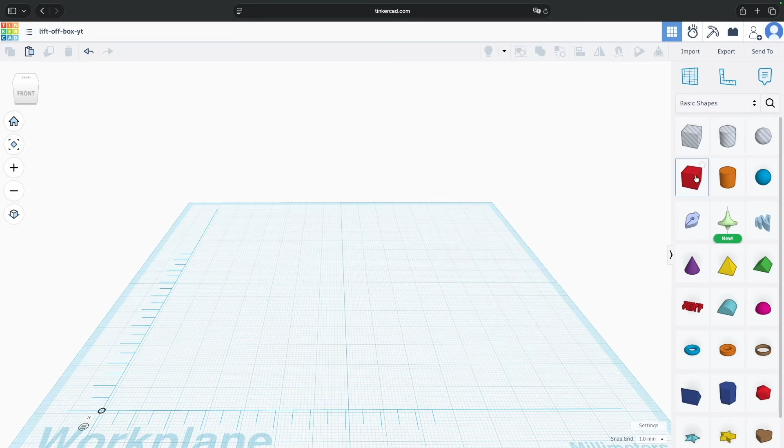The most common basic shape here is the cube, which is also referred to as box. Let's pick this and bring it to the center. Let's size the length as 50 mm and width also as 50 mm. We will make this 20 mm tall.

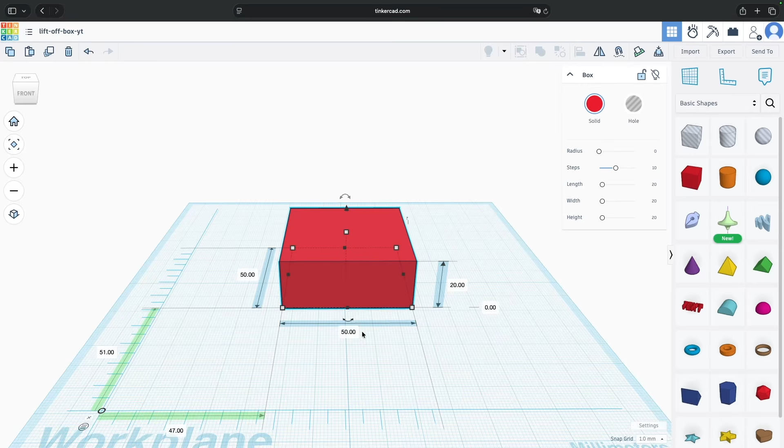Please note that I'm choosing this smaller size to ensure faster printing at my end and definitely to optimize on the filament consumption. But you can print this box in any size your 3D printer allows as the maximum dimensions. Now that we have a solid box created, we need to create a space inside this box so that we can use it as a storage.

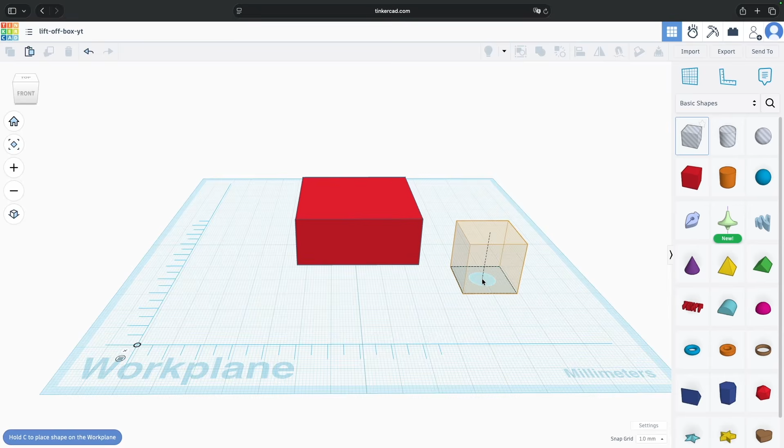For that, we will be using this hollow box. The only difference between this box and this box is that this is all solid, whereas this is all hollow. So let's bring this here. If we have to create a storage ensuring that there is a 2 mm width across all the different sides of this box, then we need to change the length and width of this hollow box accordingly.

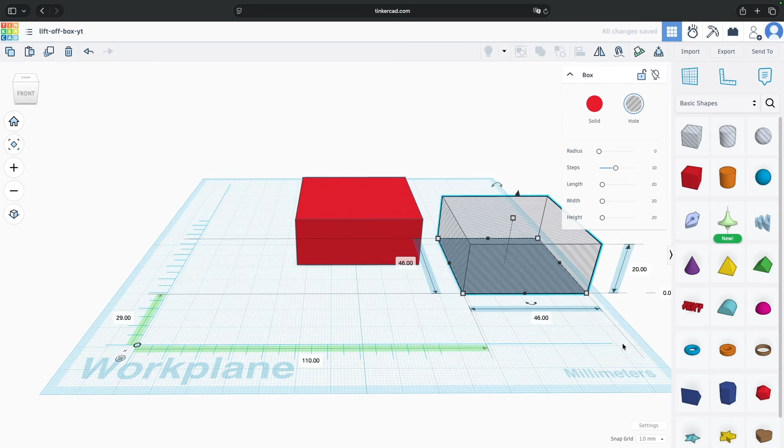Which means if the length was 50 mm for the solid box, then this will be 46 mm, because 2 mm from the left side and 2 mm from the right side add together as 4 mm, which we will reduce from the 50 mm total length. Similarly, the width we will choose as 46, and from the bottom let's leave 2 mm only, so the height will become 18 instead of 20.

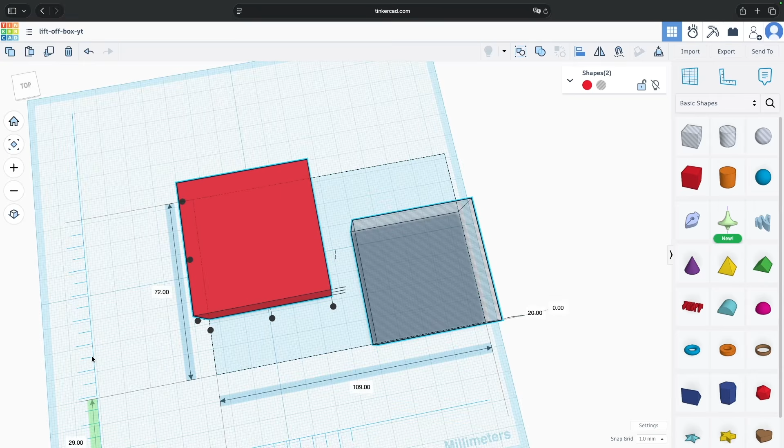Now that we have the hollow part as well as the solid part, let's align these boxes. I'll select this and select this and click on the align button in Tinkercad, and we will align this based on the solid box. So let's click on the solid box. From the length aspect, let's click on the center here, and the same thing we are going to do from the width perspective also. And then from the height perspective, we are going to stick it to the top so that the empty space starts from the top itself.

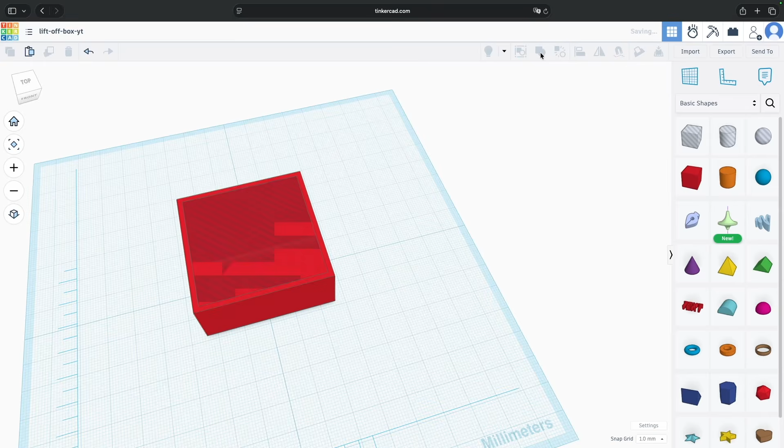And you can see a transparent space is now visible here. If you want to have a better view on this, we can combine these two items by clicking Union Group. And you can see the bottom part of the box storage is ready. A lid also needs to be created and designed in a similar fashion as we did the bottom part. But in this, we will start with the hollow part first.

So let's bring that. The height of this should definitely be smaller than the bottom part, so I'm just keeping it as 5 mm. And what should be the length and what should be the width? This is the most tricky part here. Please note that the length and width of this hollow thing should be a little larger than the outside dimension of this box. As the outside dimension is 50,

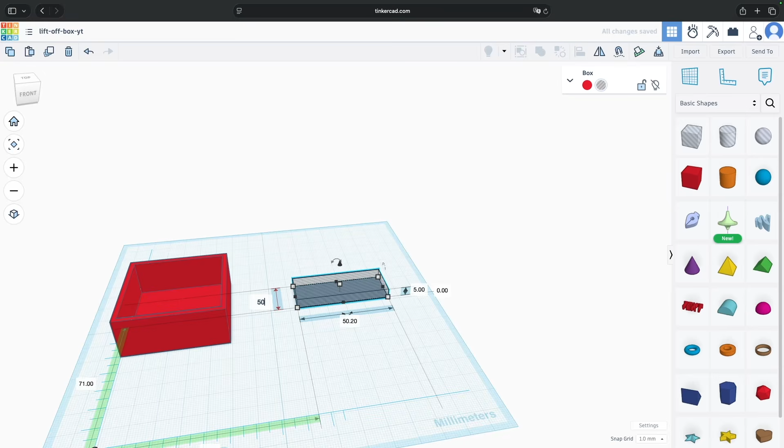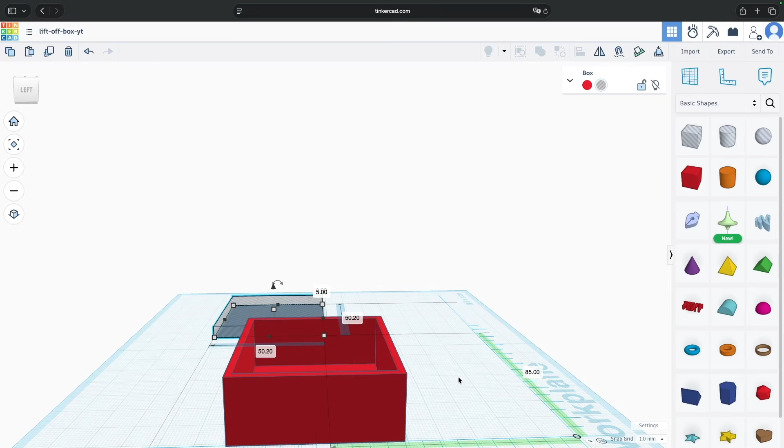we are going to keep 50.2 mm as the length and 50.2 mm as the width, which means we are leaving 0.1 mm on the left side and 0.1 mm on the right side if we are looking from this side, and from this perspective, again 0.1 mm from this and 0.1 mm from this side, which means along the periphery there is a tolerance of 0.1 mm, and this is going to help the lid fit exactly on top of this bottom part.

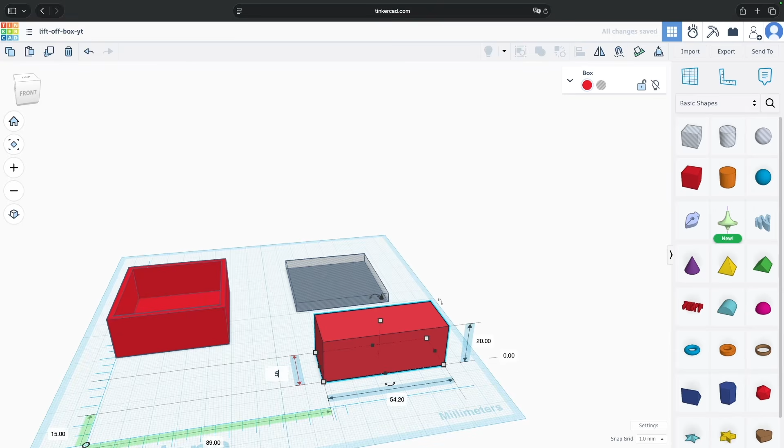Now that we are ready with the hollow part of the lid, let's bring the solid part. The length of this is going to be bigger, of course, than the hollow part, which is 54.2. Again, we are ensuring the 2 mm across all the sides of it, which is very similar to what we did in this bottom part, and which makes it 58.2 and 58.2. The height of this box is 5, so we are again going to have 5 plus 2, which is 7 mm as the height of this solid part of the lid.

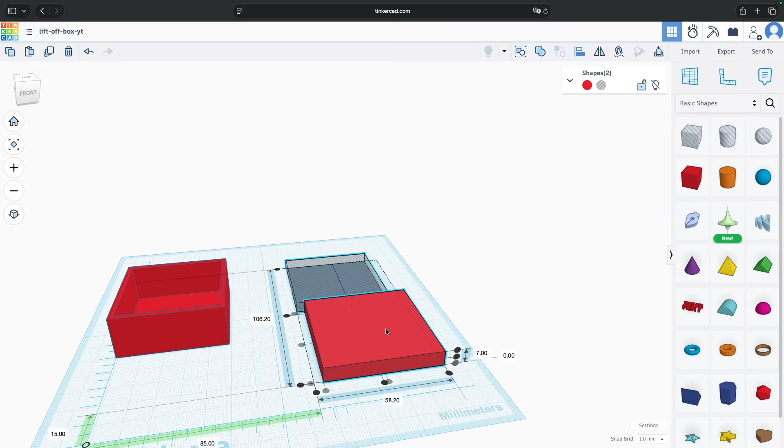Now let's align these two parts to make it a complete lid. Let's click on the solid one. Let's bring it to the center and align this at the top so that we can see the transparent zone, and combine these two shapes and our lid is ready. With this, now our model is ready for the box.

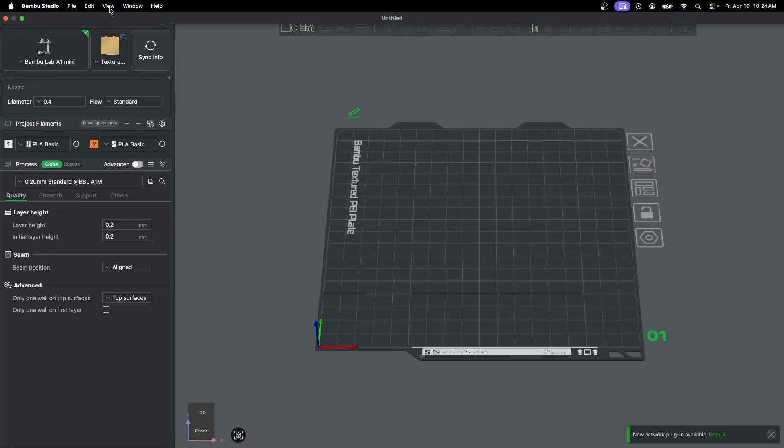So let's go and export it. I'm going to click on the export and click on the STL, which is supported with my 3D printer. I'm calling the file liftoffbox yt.stl and saving it here. Now we are at the Bambu Studio. We are going to import the file which we just saved. So I'm at the prepare stage of our project.

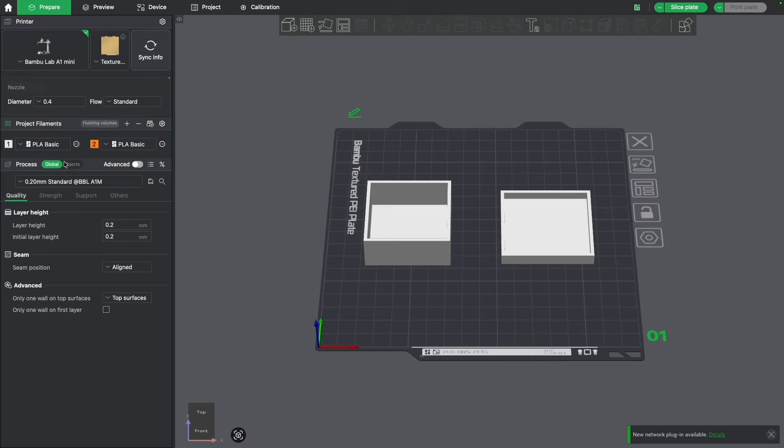I will be importing a new file with this import, and I'm going to select the file which we just saved, and this is right here. I don't need to do anything extra. If you see, we are using the PLA basic filament, and the rest of the settings remain as they are. If we go to the preview, it says the slice is okay, which means we are ready to print this. Let's click on print plate.

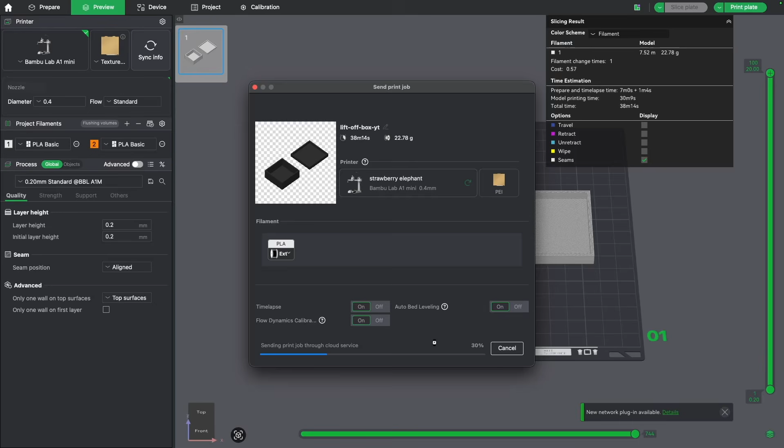It says the overall time for this box to be printed is going to be 38 minutes, 14 seconds, and this is going to be 22.78 grams. My Bambu Lab is already connected to the printer, so I can see that here. So now all the configuration is set. So let's go and click on send, and this will send the print job through the cloud service to this printer. These are the two parts which we designed.

It's successfully printed. Let's see how it works. This is the bottom section and this is the top lid. If I put it on top of the box, it grips the bottom section sufficiently so that the lid is not coming off. So even if I'm moving around, putting it upside down, nothing is happening with this. But if I'm putting a little pressure upward, I am able to open the box. And this is what we were expecting.

Please note that we have left a 0.1 mm gap across all the outside edges of this box to ensure that this fits on top of it, and at the same time if we want to remove it, it can be removed. This gap is based on the PLA filament which I am using, and the printer which I am using is the Bambu Labs A1 Mini.

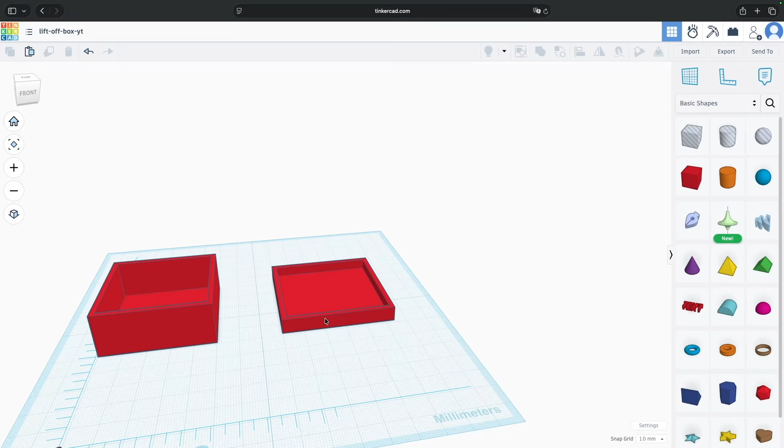In spite of these variations, the fundamental remains the same for this pattern. The lid has to snug fit on top of the bottom section of the box. With this, we are able to successfully 3D print a lift-off lid box pattern. We already saw in the video how easy it is to design such boxes and 3D print them. I hope it helps all the DIYers to define your own custom storage solutions.